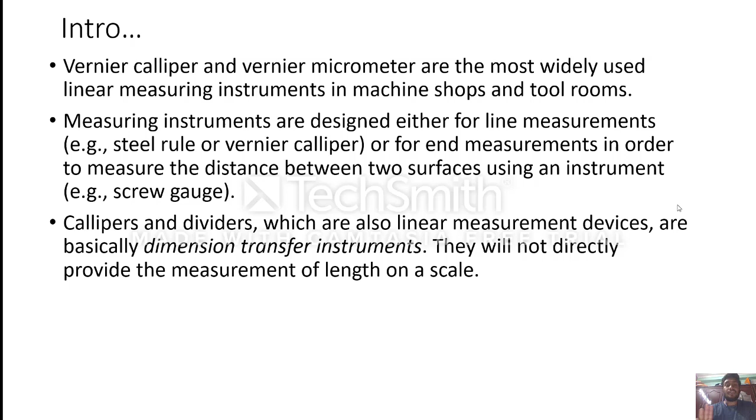Measuring instruments are designed either for line measurements. Line measurements are nothing but your scale or simple ruler or a tape measurement. Even the vernier caliper is considered a line measurement. And coming to surface to surface measurement, which is nothing but a screw gauge. These calipers and dividers are not direct measurements; they will be transferring the measurement.

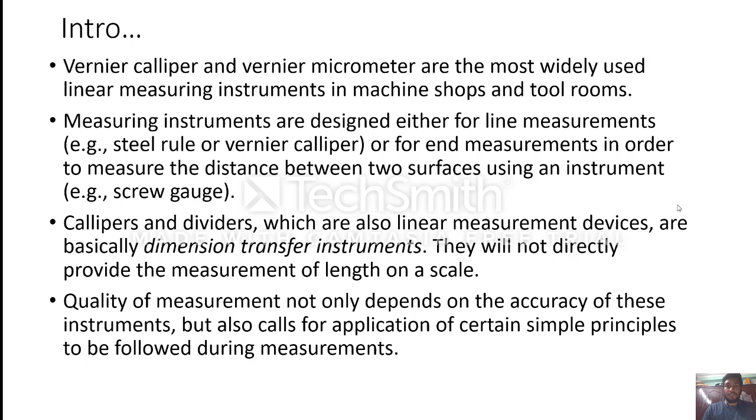And moreover, the quality of the measurement not only depends upon the accuracy of the instrument, but it also depends upon how the person is handling the instrument, what application he is using it for and at what orientation he is using it. So these things you have to keep in mind for the quality of the measurement.

So coming to the design of linear measurements, generally the modern industry demands the manufacturing of components and products at a higher degree of dimensional accuracy and surface quality. While designing, you have to keep in mind that the linear measuring instruments should be accurate and precise. At the same time it should be simple to operate and at a lower price. So these are the main parameters you need to keep in mind while designing any type of linear measuring instrument.

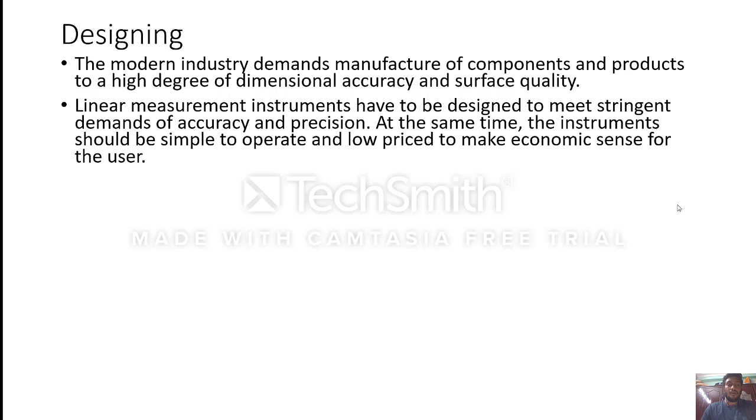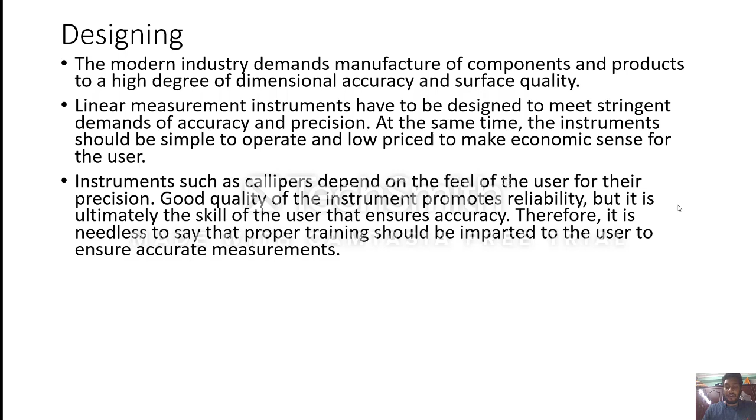Generally, an instrument such as a caliper depends upon the feel of the user. Good quality instruments will promote good reliability, but it is ultimately the skill of the user how he is using it. So definitely he should be trained before using any linear instrument. And moreover, the important element of the reliability of an instrument is the readability.

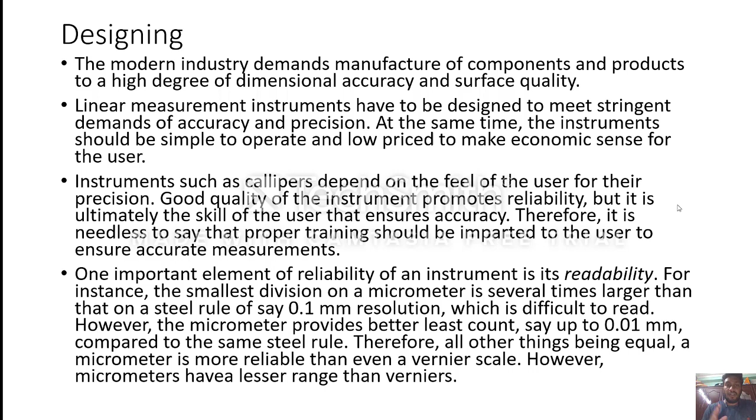So now coming to these vernier instruments. As we know, the steel ruler can measure up to 1 mm, then a maximum of 0.5 mm. Beyond that, if you want finer levels of measurement, you can't do it with a normal steel ruler or a tape measure. So you have to go with a vernier caliper or vernier scale, whatever device uses a vernier scale.

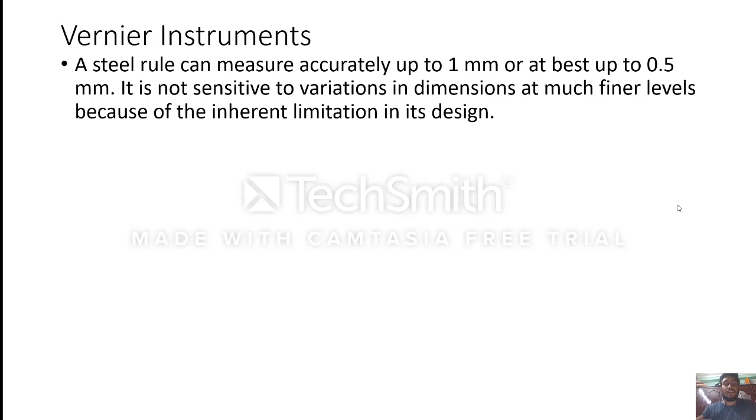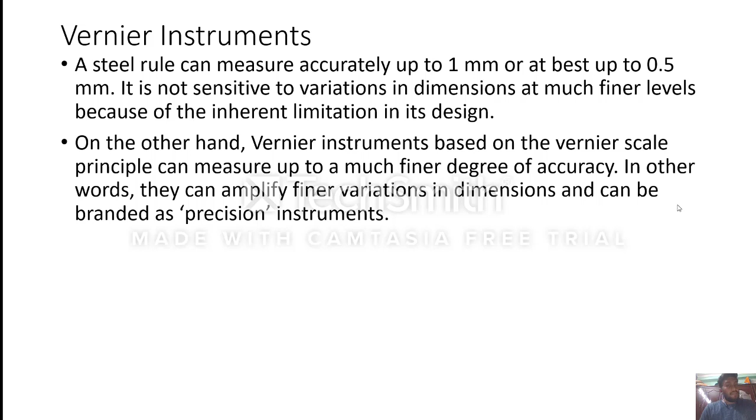On the other hand, the vernier instrument, based upon the vernier scale principle, can measure to a much finer degree of accuracy. So we can say that it can amplify the variations in the measurement finely. That's why it is called a precise instrument. The vernier scale was invented by a French mathematician, Pierre Vernier, in 1631. Later it was developed by an American called Joseph Brown.

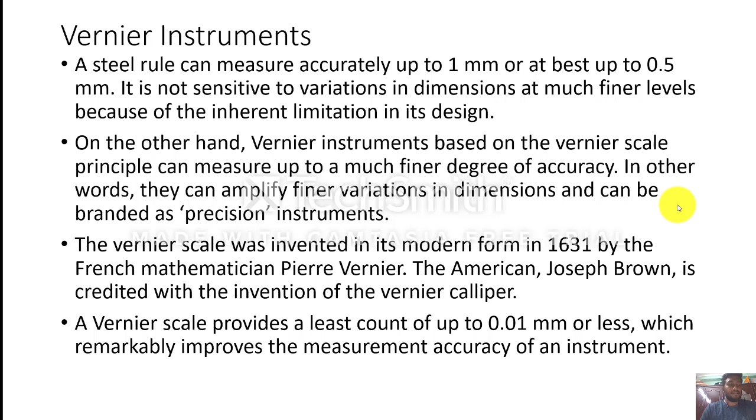Yeah, that's it. You know that the least count of vernier is 0.01 mm or less. So now let us see the vernier scale. The vernier scale generally consists of two scales, which are a main scale and a vernier scale. As you can see in this diagram, this is the vernier scale and this is the main scale. The main scale has the general readings of your normal ruler scale, and the vernier scale generally will be

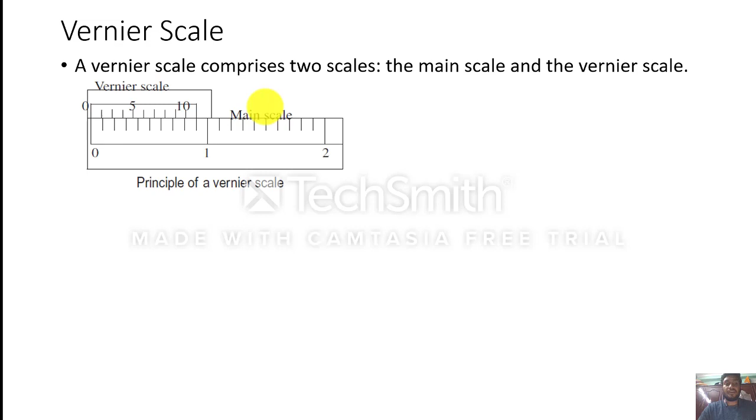having 10 divisions. Now let us consider that 10 VSD equal 9 MSD, which means 10 vernier scale divisions are equal to 9 main scale divisions. Here you can observe that the value of 1 VSD is less than 1 MSD. So these types of scales are called a forward vernier scale.

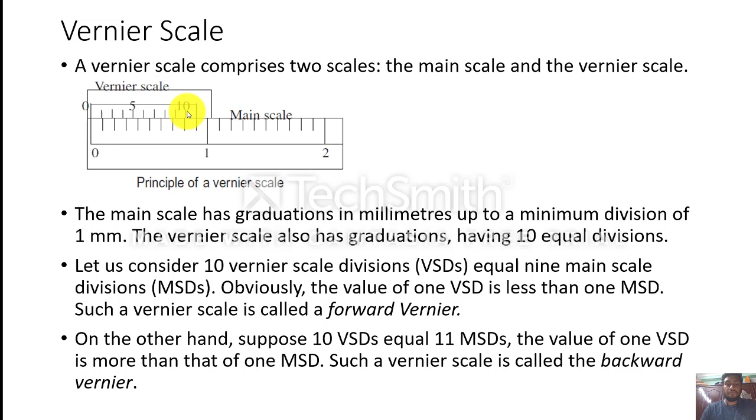And in the same way, if it is the opposite, if 10 VSD equal 11 MSD, then we call it a backward vernier. Here one value of VSD is greater than 1 MSD. So now let us see how to calculate the least count in a vernier scale.

The least count is defined as the minimum length or thickness that can be measured with a vernier scale, or you can also call it the minimum resolution. Now if we consider the forward vernier, n VSD equal n minus 1 MSD, as I defined in the previous slide. Now 1 VSD equals (n minus 1)/n MSD. The least count is defined as the minimum length or thickness that can be measured.

So 1 MSD minus 1 VSD is the least count formula. Here you can see the formula for the least count. Then if we substitute VSD in terms of MSD using this formula, you will get least count equal to 1 MSD by n. Then the total reading equals MSR, the main scale reading, plus VC, where the vernier scale coincides with the main scale, into the least count.

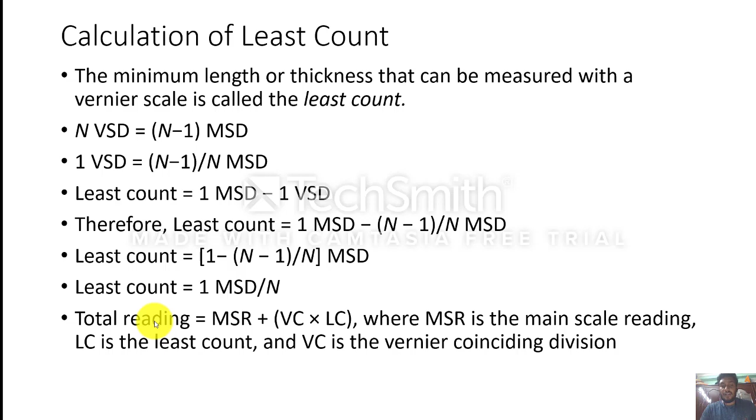Even though the vernier instrument is used in some laboratories and mostly in tool inspection, in production these vernier scales and vernier calipers are not used. There we'll be using limit gauges and comparators. Okay. So guys, that's all for today.

In the next class, I'll be going with mechanical instruments. I'll be explaining what a vernier caliper is, what is meant by a micrometer, what depth gauges and height gauges are. Then after that, I'll be discussing intermediate instruments. Limit gauges and slip gauges will be coming there.